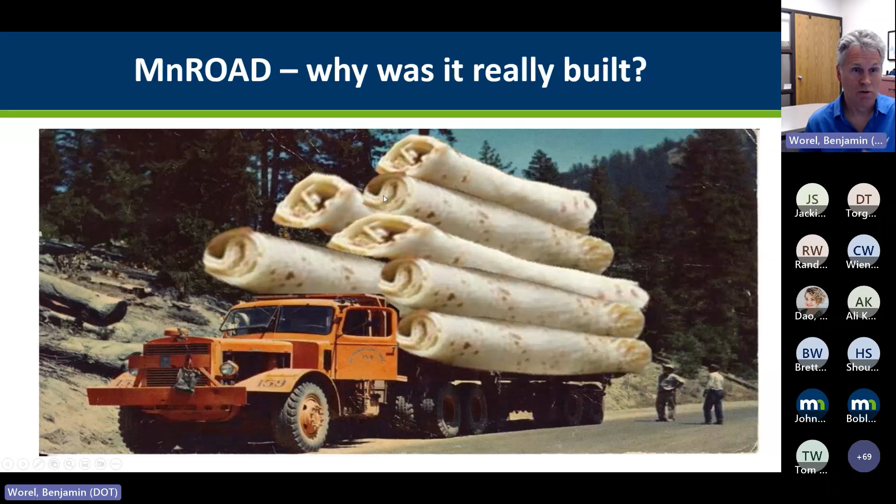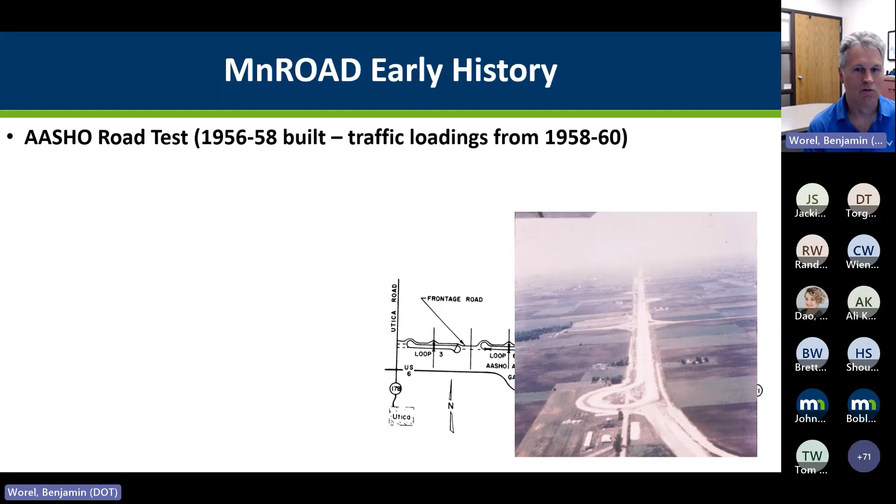It probably wasn't to haul the lefse from Norway to Minnesota, but really, early history when you look at MnROAD, it's really looking back to the AASHO road test. That was early on in Ottawa, Illinois. They built a section that looks kind of eerie, like MnROAD in a way, with a low-volume road. You could have taken this picture probably from Dan Rauscher. Could have been out at MnROAD doing some live dynamic testing, but a lot of instrumentation went into that.

MnDOT really started looking at kind of the need for local calibrations based off those AASHO road test results. How do you do it in Minnesota? How do you do things like that?

So we did kind of investigation 183, looking at some of the flexible pavement designs. SHRP LTPP started national efforts in '88. That's when Gene Skoke and Dick Engberg used to take me out for ice cream cones celebrating that date. But that's when we started working with the LTPP, which really helped with our local calibrations.

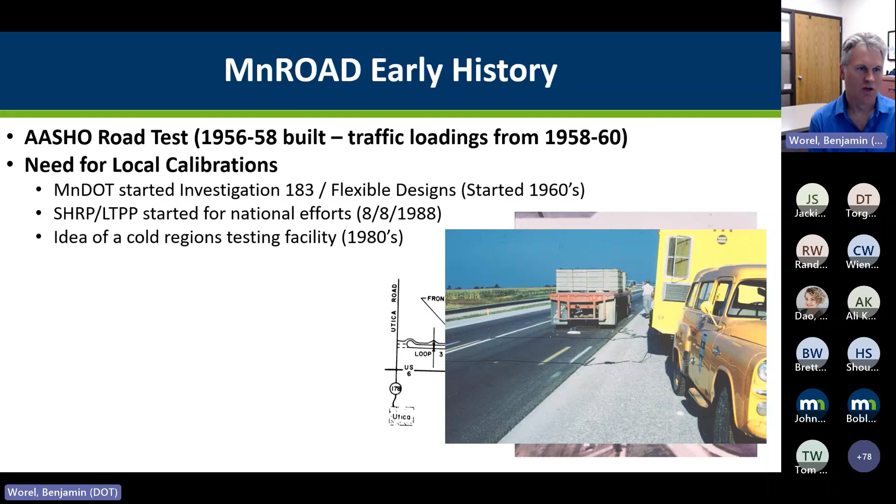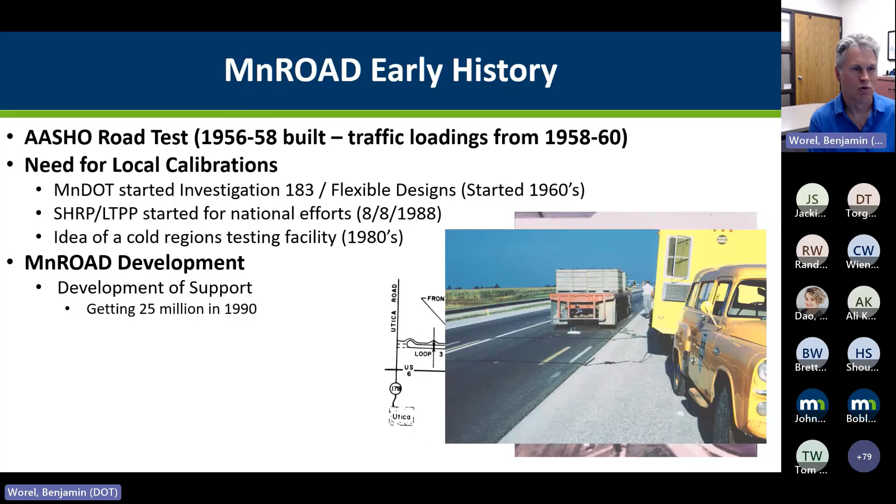We started talking about the need for a cold weather region testing facility in the 1980s, and that's kind of when the idea of MnROAD developed, the idea for development support. We had to get $25 million to pay for MnROAD in 1990. That's pretty amazing. You have people here in Minnesota that I'm not going to go through all the names, but they were influential in getting this funding needed to build this type of facility.

When we started looking at the facility being built, can you imagine trying to find 75, 80 million in today's dollars? It's pretty incredible that they were able to do this, in a political situation that we're all in as DOTs. So hats off to them.

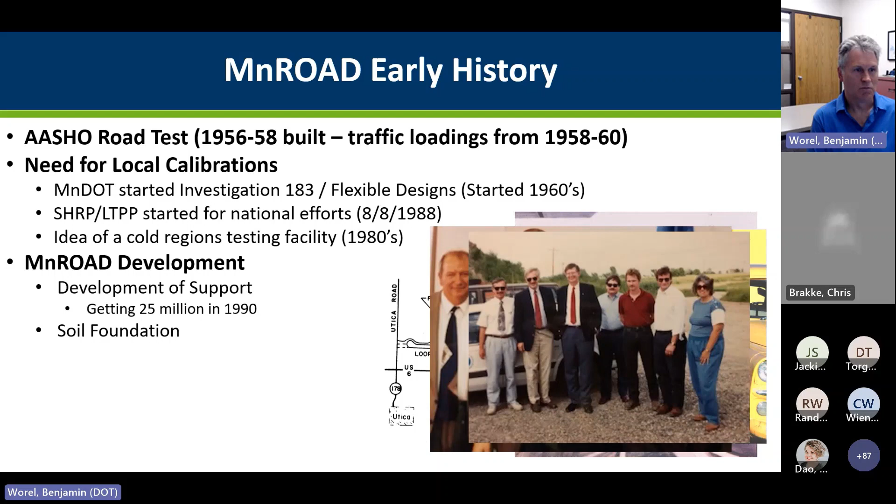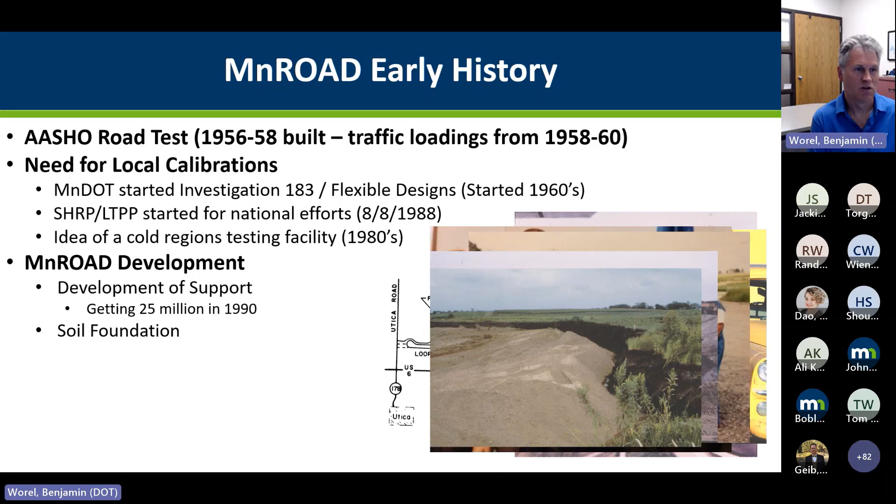They did a lot of different soils work. It's hard to imagine this was MnROAD, but this is part of MnROAD as they brought in different soils and different sand. We had sand and clay subgrades. There's clay out there right now. That's our natural soil foundation.

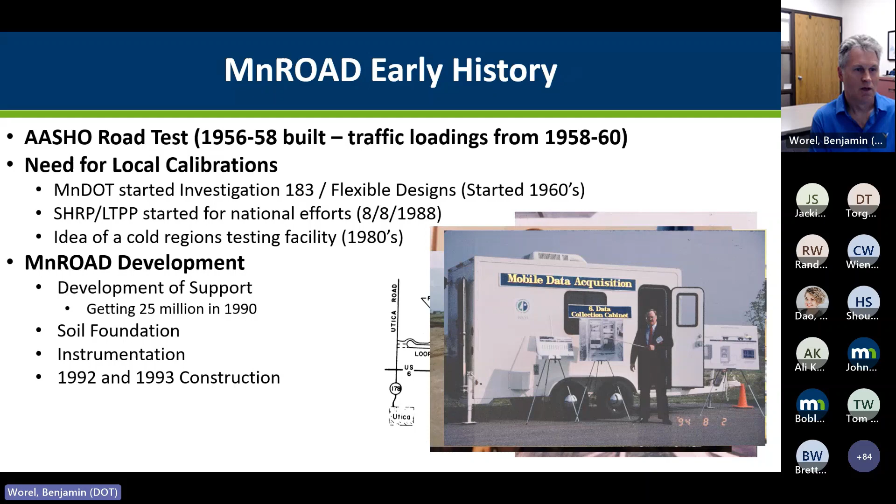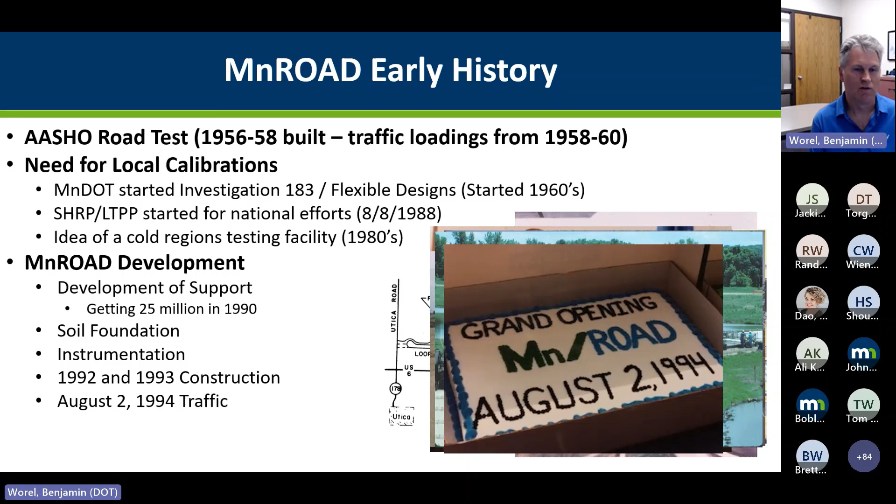The instrumentation needs - this guy's got the best picture of the instrumentation. We used to have a mobile lab. But the construction was done in 1992, 1993. They're paving the loops, and on August 2nd, 1994 is when traffic was placed on MnROAD. So that's some of the early development.

MnROAD is owned and operated by Minnesota DOT. We do both concrete and asphalt research. We also did gravel road research at one time on the low volume road. But again, we have 30 years of customer service. Minnesota Department of Transportation has been a key player for many years. The Minnesota Local Road Research Board, cities and counties, provided up to $500,000 per year for the last 30 years. So thank you very much to them.

As time went on, we started doing more national things, before we did more localized Minnesota things, which is not bad. But we did start going outside for SHRP 2, NCHRP, FHWA, and different partnerships. We started later on after probably 10 or so years of activities. Right now we're doing a lot of pooled funds and working with industry.

We did major experiments. Phase 1 was a structural experiment, like I said, looking at the AASHTO designs, Ottawa, Illinois. But basically we found that our 7.5-inch concrete lasted as good as our 9.5-inch concrete. You can have some savings there.

Also, we found that the environment plays a bigger role in our asphalt pavements than we originally thought, and that's kind of nationally. We saw that through the SHRP and developing asphalt binders for your local agency and traffic. The last few phases in 2017, a lot of work with NRRA and NCAT. I'll be talking about NRRA quite a bit and touch upon NCAT, but in phase 4 that we just went through, NRRA and NCAT were also key players in those experiments.

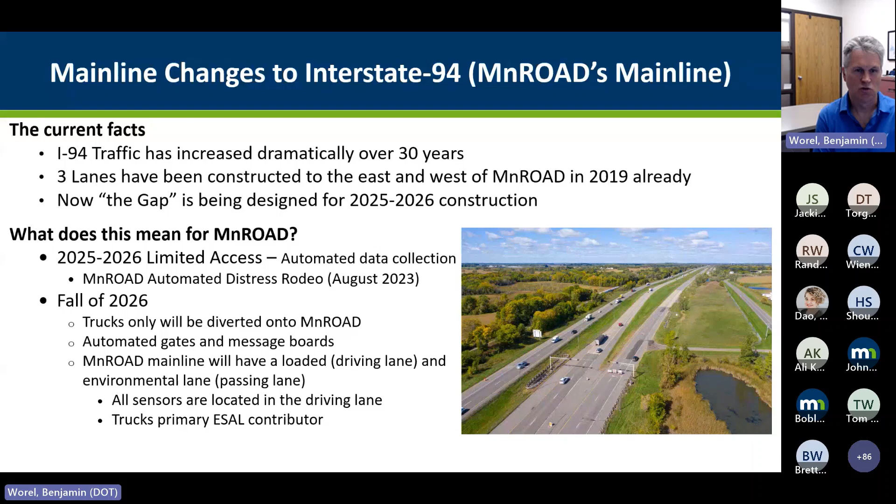But we're looking at different ways that we can monitor pavement performance without being on the roadway itself. And so automated distress is one way we're looking at that. At drones, GoPro cameras, a lot of different things. So if you have ideas on that, let us know. Jacob Calvert from our office is leading that.

But in the fall of 2026, MnROAD will turn into a 1-lane, trucks-only, diverted onto MnROAD. We'll have automated gates and message boards to help the driving public and get the trucks onto our test sections. But again, MnROAD main line will turn into what the low volume road is, where the driving lane will be where the trucks are, and the environmental lane will be the passing lane.

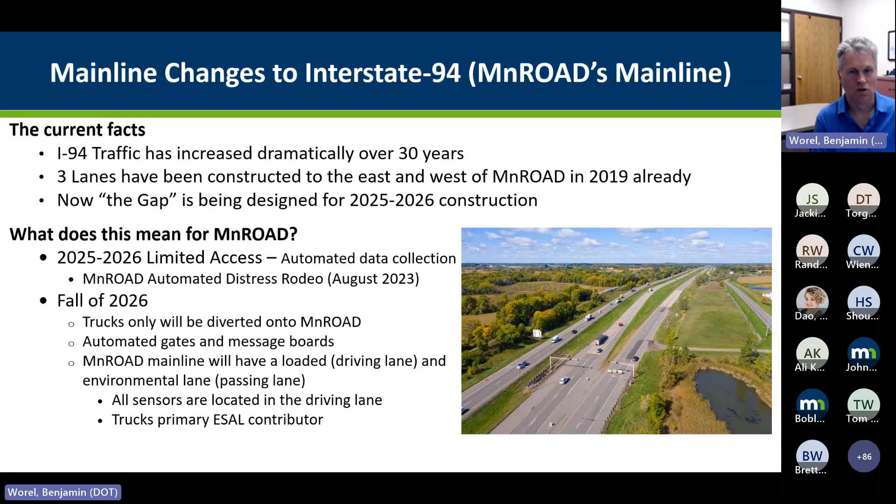So it'll be a little different, but I think we'll still have lots of ways to look at different materials and how they perform over time. Again, all the sensors are located in the driving lane, and the trucks are the primary ESAL contributor anyways. So I think we'll still get the same ESALs that we have now.

Talking a little bit about the fine research staff we have here.

That's not them. One of those turned into a marketing person, and the other one is still going to school, my daughters, when they were skating out at MnROAD many years ago.

But again, the experienced staff, we have 27 road research staff under Jeff Brenner, working both at MnROAD and other areas. We also got a very active Maplewood lab group that supports MnROAD and works with MnROAD, and the material engineers support us throughout our districts in Minnesota here.

Again, our MnROAD operations, I work with Emil, Joseph, Michael, and Jacob. Great staff, engineers to have on staff. Also Jeff Tabry out at the site with Craig, Dan, Jesse, Troy, and Steve. Steve kind of works both in MnROAD and Maplewood. But again, you can kind of see where the red is people that work both at the Maplewood lab and at MnROAD. The black there is the ones that work out at the MnROAD facility.

So we have 10 people working with research projects. So when you work on a project, you'll probably be working with one of these people there, and they do a great job.

So when we talk about data at MnROAD, you talk about performance monitoring, we've probably tried everything. That kind of shows a list of different things we do between the distress surveys, the modified LTPP survey, to dynamic load testing, to joint faulting, friction, falling weight deflectometer, noise, piezometers, pliometers, ride quality, pathways, LISA, and all of these different types of things, surface texture. We've done a lot of different things, and these are the things that we do all the time.

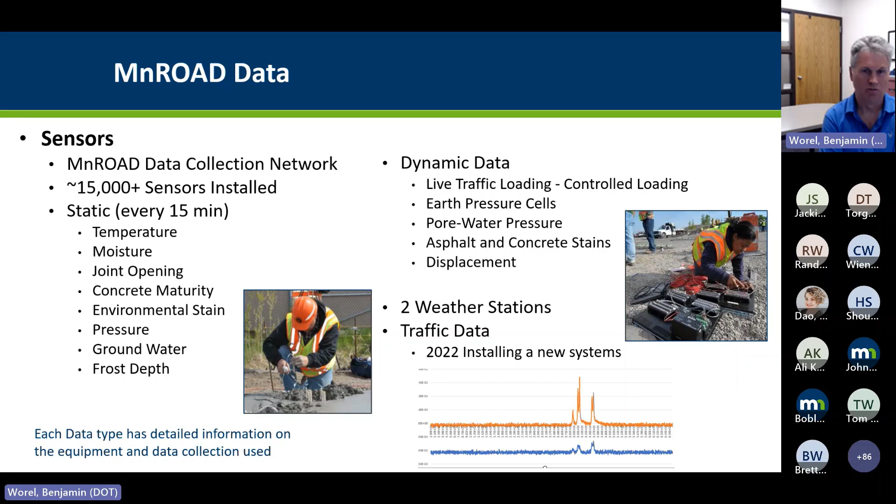But lots of experience, lots of different types of data, static and dynamic. And again, we have information over 30 years on all these different test sections that we have. And we also have 2 weather stations and traffic data, and we're installing some new sections right now, kind of looking at different national calibration needs for different types of weigh-in-motion sensors. Joseph Podolsky's working with that, with these national groups that are doing that and the partnerships that are involved to bring that to fruition.

So when I talk about data, I mean, this is kind of crazy, but when you look at thermocouples, this is temperatures, and we have temperatures down in the asphalt, concrete, we have them in the base, we have them in the sub-base, we have them in the subgrade. We can go down to 8 feet on some of our thermocouple data. But we've been collecting this for like 30 years.

Whoops, it's not supposed to do that.

And when you look at that, this is a number of rows for each year of data. It's just kind of mind-boggling. We're talking about 37 million records in 2013, things like that.

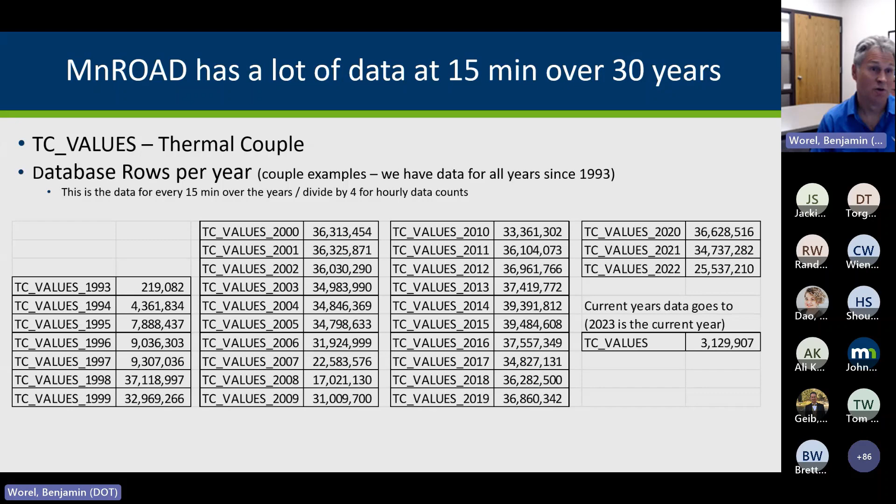And this is just one sensor, one type of sensor. So all the ones have similar information. So it's mind-boggling how much data is out there and how much it could be used and how much is probably underutilized. So if you have interest, let us know.

So when you talk about getting access to the database, the MnROAD database has really kind of evolved. We do have an Oracle database here in Minnesota, but we have been utilizing the InfoPave system that LTPP has developed. We use that framework to develop our own, as you can see right there, but it's under the non-LTPP side of things. NRRA helped fund this, MnDOT helped fund this, and FHWA has been a great partner in working with this. We're seeing how we can bring test track data into a national database to be shared.

And what this system does is allow users to get a MnROAD overview. You can find test sections. You don't have to know what cell it is or what section it is. You can just say, I want warm mix asphalt, or I want fiber reinforced concrete, things like that. It'll tell you the test sections. You'll be able to see the available data, view the data. You can see the performance maps, the performance, and maps of it. We're working on getting related reports to each of those efforts, and we're working on the sensors right now. So a new release will be coming out soon.

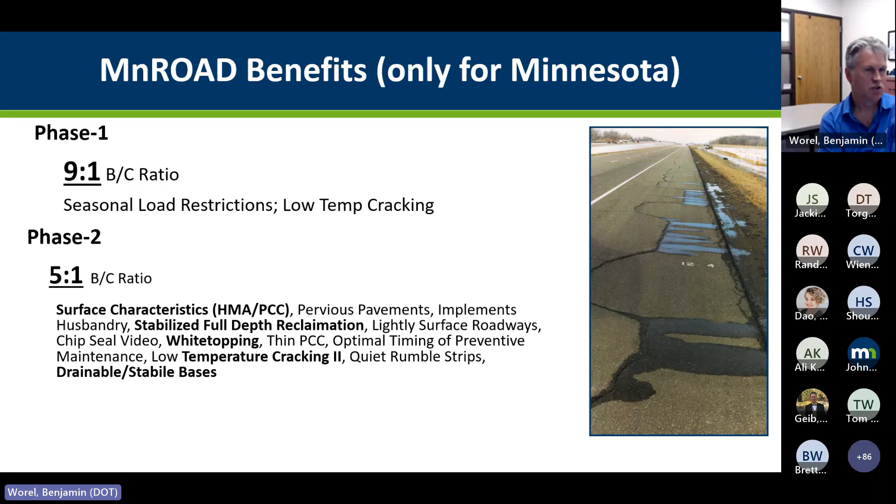So when you look at all the things at MnROAD, we've done a couple different benefit cost ratios. We did one early on with our phase 1 efforts. We found that we got a 9-to-1 benefit cost ratio looking at spring load restrictions and how we've saved money with the process we have. Low temperature cracking is another one. In phase 2, we found a 5-to-1 benefit cost ratio. So, and I'll talk about a few of these projects, but we have seen that from the investment in the research, we have gotten benefits beyond what we've invested.

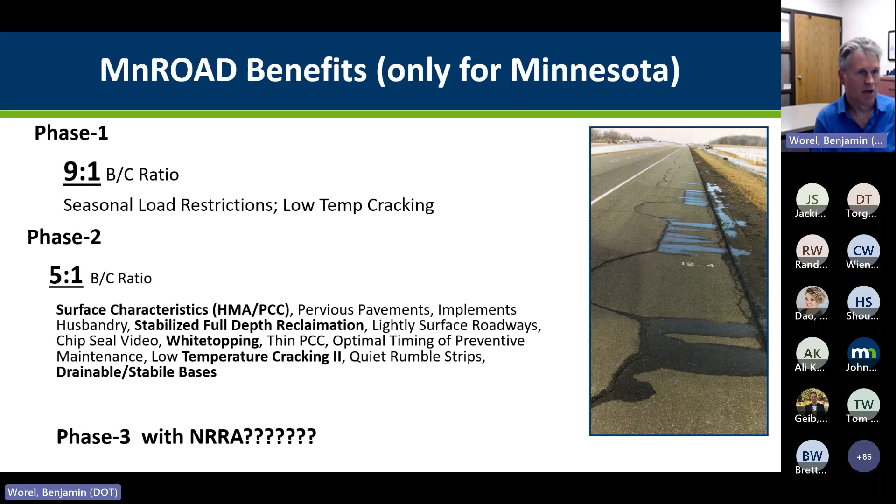And I'll talk about a few of those here. So, one of the things we should start thinking about is phase 3 with NRRA, kind of coming up with another one of these efforts as we move forward, but that's something in the future.

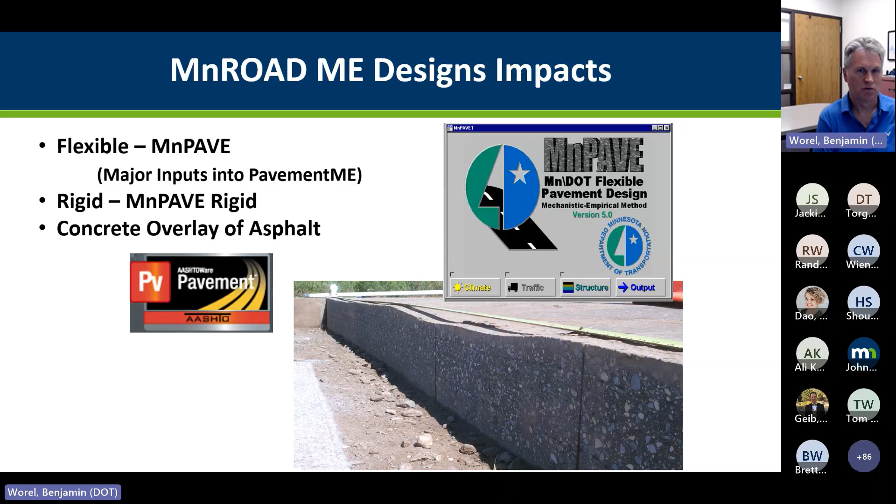So I think MnROAD's done a great job on pavement ME, looking at developing MnPave here locally for Minnesota. But again, major inputs to pavement ME we've developed. That's our flexible. We also did the bonded concrete overlay ME on asphalt. Again, you can see the picture there of whitetopping that looks like it's gone horribly wrong, but actually I think that's beautiful, because that shows how you can try a design, see how it performs in a small scale, and say, hey, maybe you don't put the joints right where the wheel paths are. Maybe you can't do a 3-inch concrete over asphalt.

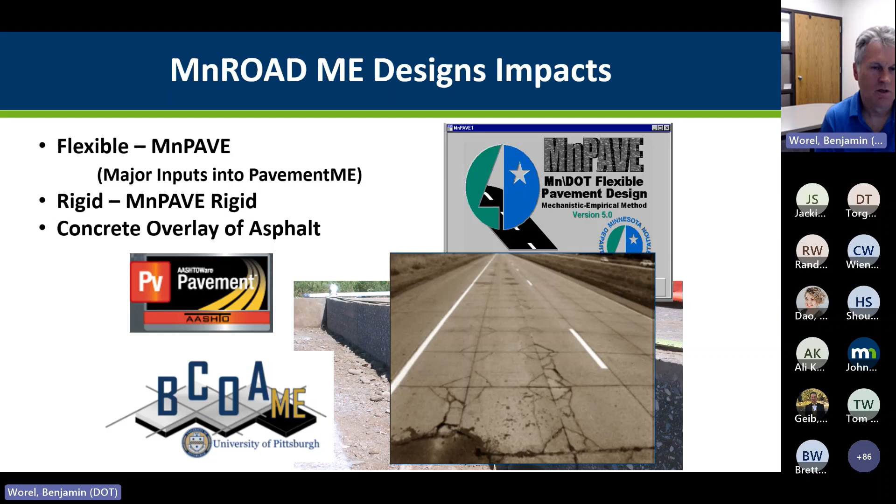But it did show that you can get 7 million ESALs on it before this happens. So maybe on a low volume road that might work. So it kind of shows how MnROAD can be used as accelerated pavement testing.

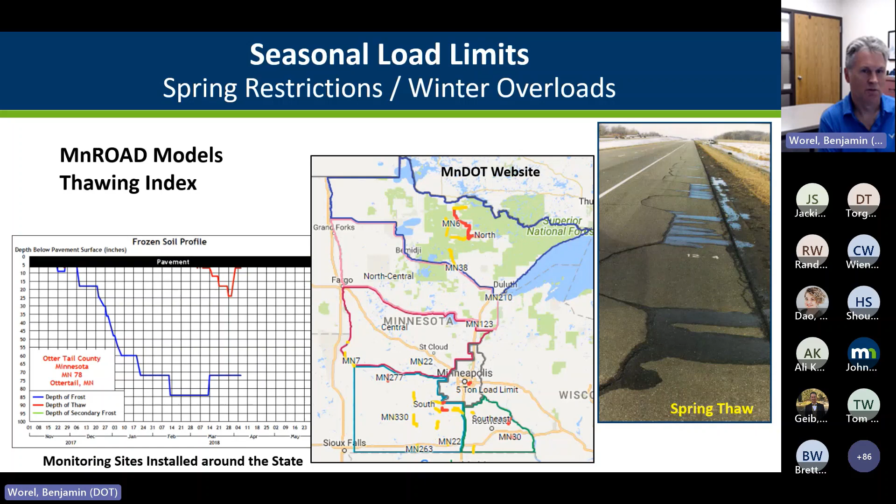We've done things on seasonal load limits. We do spring restrictions here in Minnesota and winter overloads. They have a great process with different monitoring sites around the state, and models that were developed from MnROAD to help local agencies put on spring load restrictions.

We've learned a lot on low temperature cracking. Again, I mentioned before that with HMA, we learned that the environment plays a huge role in its performance. I don't know if we were using asphalts that weren't for Minnesota, but now we've learned better, I guess. You can see here the original test cells at MnROAD, the first 1994, 1995, related to linear feet of transverse cracks. We had 2 different asphalts, but we had very little cracking.

You can see that we had 5-year and 10-year cells. The solid is 10-year, the other 5-year. So it's basically thick and thin, if you want to think of it that way. But you can see how the 10-year and the 5-year cracked the same. That was because there's a PG 58-28 in the green. But you can see that the 64-22 cracked a lot more and stayed cracked. And again, this is just the linear feet of cracking. The distress changed over time and got more severe through the years. But it really shows how picking the right asphalt is really beneficial.

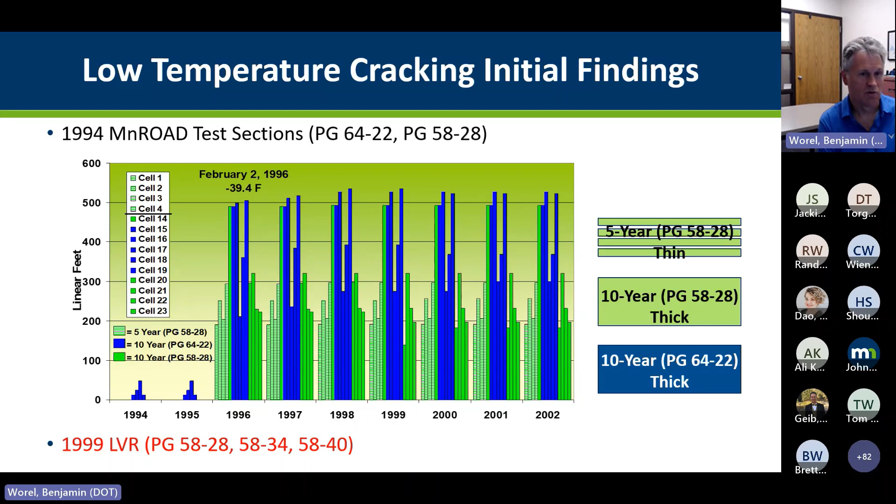And then even a simple study we did in 1999 on the low volume road, where we used a 58-28, 58-34, and a 58-40. We learned from there that the 58-34 is the Cadillac oil here in Minnesota, but it is more expensive because it's polymer modified. The 58-40, in 1999, didn't work at all because of engine oils that were added and it separated. We got a lot of cracking. The 58-28, we got our normal cracking. But we've improved upon that. We do have 58-40s now that are better quality asphalt materials from our refineries in the industry.

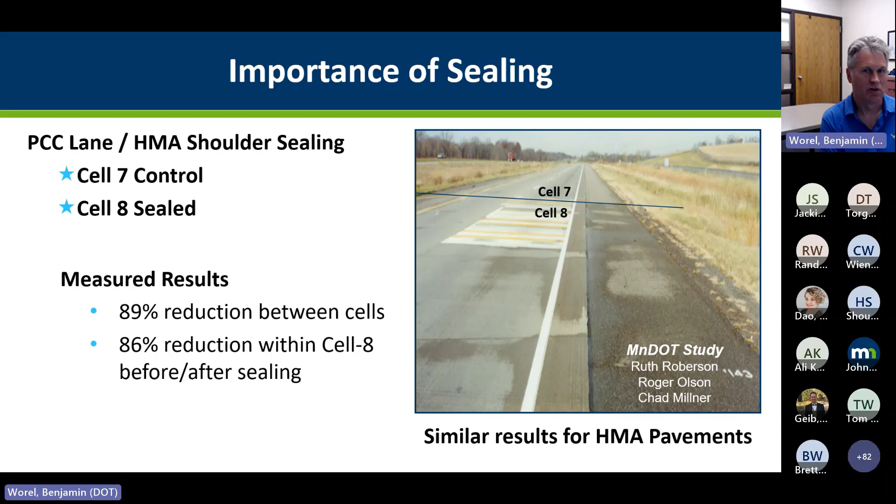Learned a lot about sealing, that if you can keep the roads sealed, you get a lot less water going into the bases. The instrumentation at MnROAD showed this, where you get about a 90% reduction if you seal the edge joint or seal the cracks. We did both asphalt and concrete and different things. So sealing is important if you want to keep the water out.

And we learned a lot about drainage. You can see the transverse crack there in the upper part and how that asphalt deteriorates. We get an increased ride roughness when we don't have a base that drains. We also see it in concrete, where Tom Burnham worked a lot with this. You can see there where we had a non-drainable base, the scoured concrete on the left concrete core. The right concrete core had a drainable base, PASB.

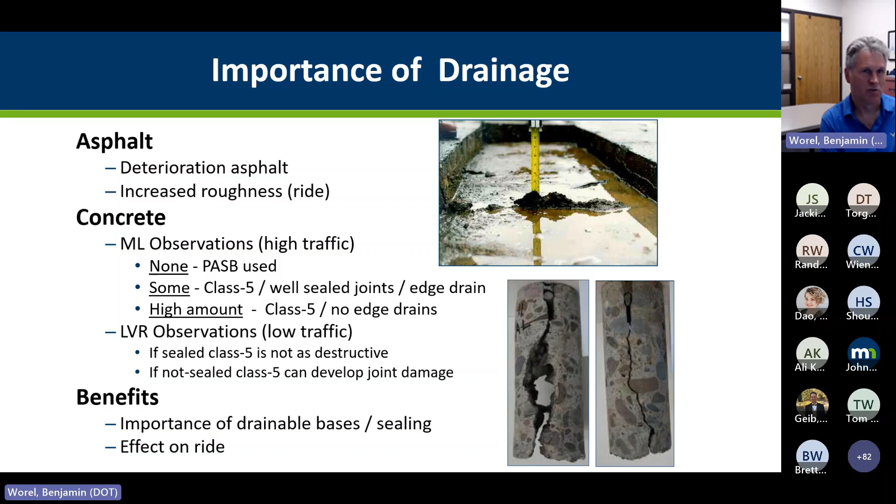And that allowed the water to flow through and not get caught in that joint and have problems as time goes on and traffic goes over it. So again, it really shows the benefit of having a drainable base. Even though it is harder to construct on a drainable base, I think there are a lot of benefits to having that drainable base there. Talking about drainable bases, we did some work with geocomposite barrier drain.

This is something that Bernard and I kind of talked about doing, since you could have a regular base underneath a concrete road, but you could drain just the concrete joint. And this actually is a spec here in Minnesota, utilizing this kind of layout as an alternative for different construction if they'd like to try this type of method on a road. We've done this on some of our ring roads around the Twin Cities.

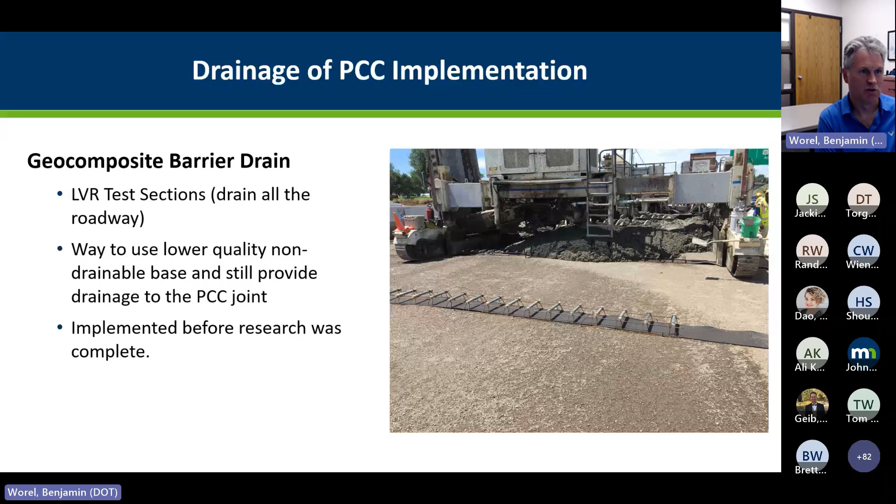Recycling, again, I think this has been a very important project because it really shows how you can recycle a road and put a very thin surface on it and get a good performance. We designed this in 2007 to last for 5 years. It went on for 13 years, and we still had good performance on a few of these cells. So it really shows how recycling does pay off.

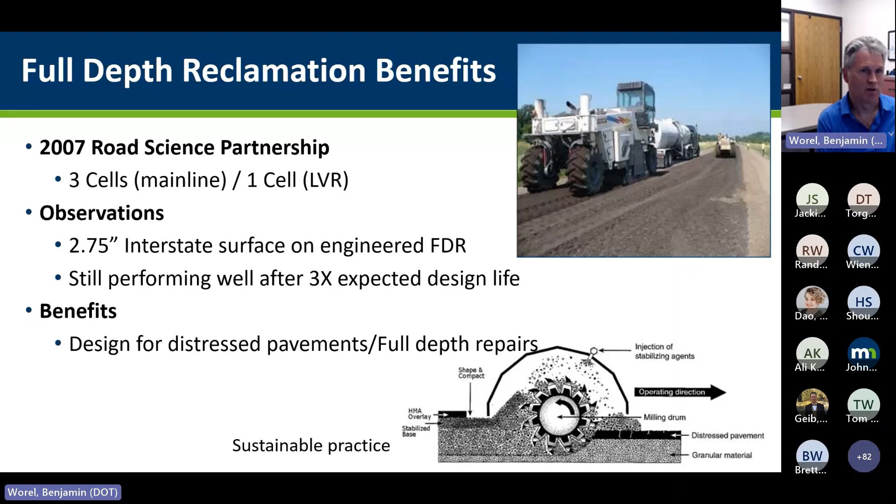And that kind of ties into what we've done with 70th Street, which I think has been another important project that MnROAD's done, where we did thin overlays on all these, but then we did SFDR, CIR, CCPR, and regular mills and fills. But really, we had a hideous road, and we've gotten a good road out of it. And it's been since 2019 on that. We've gotten 4 years of performance out of a road that I didn't think would ever last.

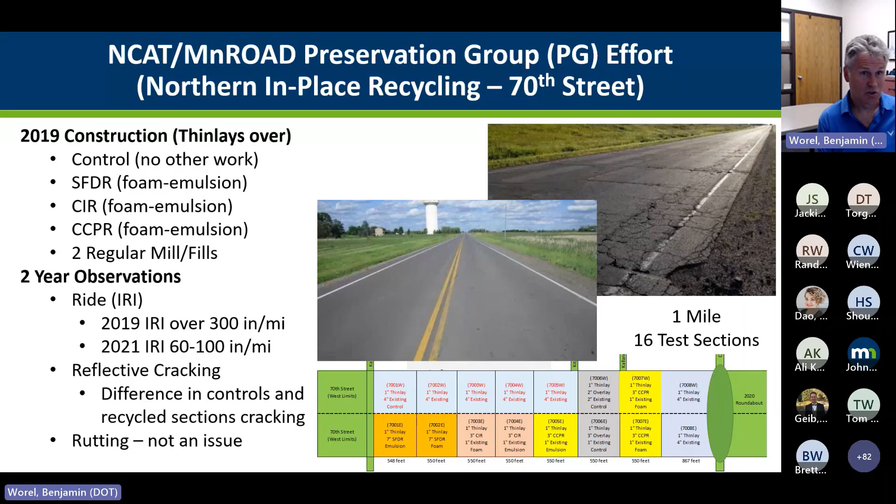And that kind of shows the partnerships we have with NCAT and the benefits. They've done some stuff down south. We've done some stuff up here north, both accelerated pavement test facilities. We've worked with the cracking group experiments, looking at different types of cracking and performance tests that go along with that, with test sections at both MnROAD and NCAT.

The additive group study is something that we're in right now with NCAT. NCAT's really focusing on fatigue cracking and we're on reflective cracking, and I'll talk about the MnROAD reflective cracking challenge. But again, there's been great coordination. New York has made that possible with their participation, and the preservation group study that we've been doing over the years. These different types of partnerships really help out, I think, with our customers and their needs.

It sounds like states are going to be building test sections and monitoring them, providing data to us to put into the MnROAD database. But training and implementation is going to be key to this too. There's a number of customers that we need to work this project towards, in phase 3. When it comes down to it, we'll be developing this for 2024 in January. So at NCAT, that's solicitation 1581, if you're interested in that.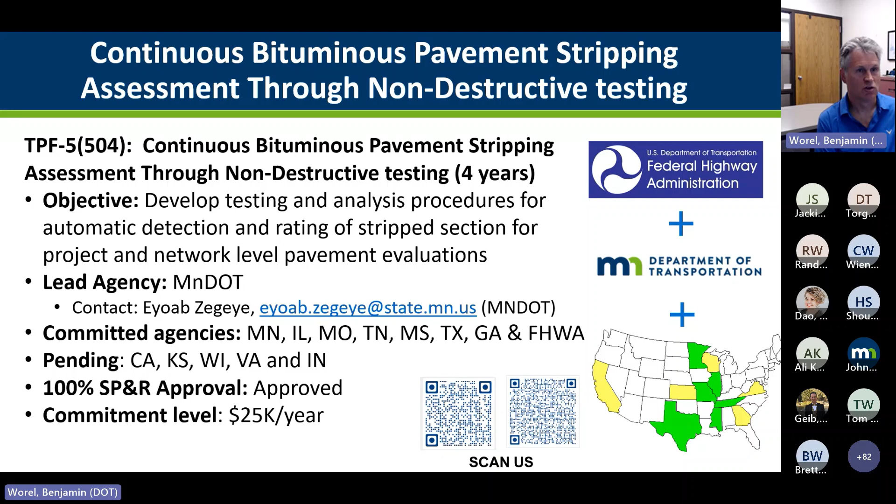This study is looking at GPR and how to find strip sections, looking at moisture and bases and things like that. This is another pooled fund that's bringing different types of technologies together. MnROAD has equipment called the MnDOT Road Doctor, which has 3D GPR, and a falling weight deflectometer goes along with that, and so on. So some different technologies and different pooled fund studies that I wanted to mention.

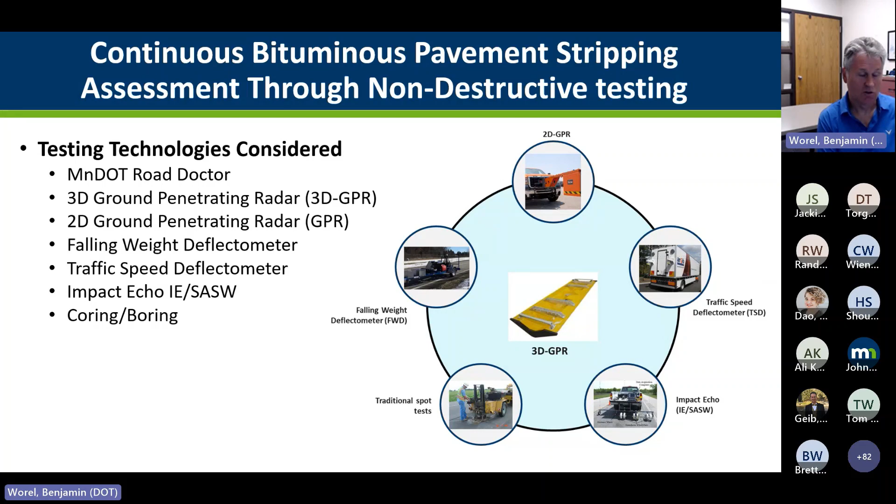I've gone over my half hour on MnROAD, so I'll talk a little about the National Road Research Alliance. I think this came together as MnROAD started out being very much Minnesota-focused. Later on, after 10 years or so, we started talking about how this facility could be used as a regional, national facility to help out others, and I think it also helped with some of the costs of the facility.

We used to have TERRA before this. They didn't have money to do things, but I think NRRA has the funds to do stuff. It's TPF 5466. We finished our first 5-year phase 1, and now we're into phase 2, the second year of that. We have, as you can see there in yellow, our 13 full participants.

Our fee structure uses SP&R, state planning and research dollars, that are used for pooled funds. It's $150,000 if you're a state that's as big or bigger than Minnesota in SP&R dollars. If you're lower, you get less SP&R dollars, so it's $75,000 a year. For example, North Dakota has less SP&R dollars than us, so they pay 75, whereas Minnesota pays 150.

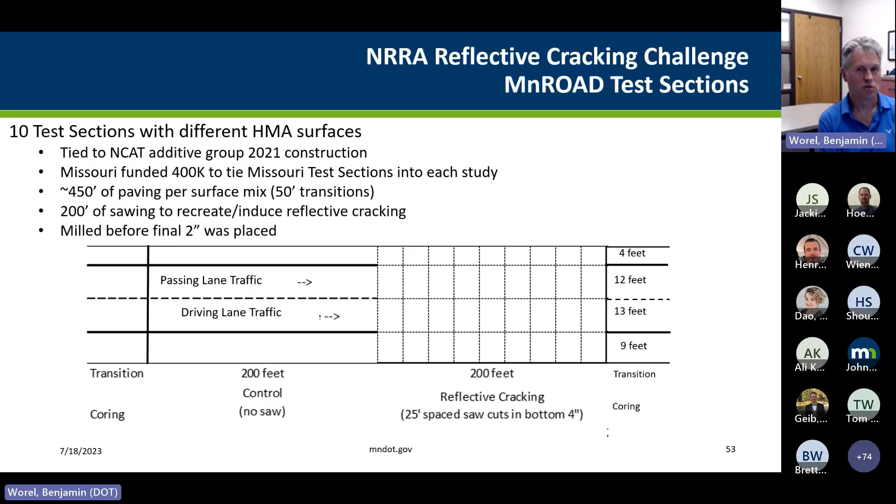But we built some test sections here in Minnesota, looking at having 200 feet of no saw, but then we have 200 feet of sawed material that all these different mixes were placed on top of for our test sections. And looking at those test sections, we built stuff with wet and dry plastics, wet and dry rubbers, control mixes where we did...

4934, that we feel that if you look at the lab tests, it should rut at 2238 there, but we're not seeing that in the field. So we tried that because that's a very economical binder.

But we also used our traditional 5828s and 5834s, looking at other controls, along with the SuperPave 5. So we're able to do lots of different things.

But again, this was brought together. The connection with NCAT is because New York participated. And so we were able to do a no-cost agreement with NCAT, having the funds to be utilized from New York to help with the tying of these projects with NCAT and MnROAD.

They did a lot with getting these materials. Again, these same materials are down at NCAT as in Minnesota.

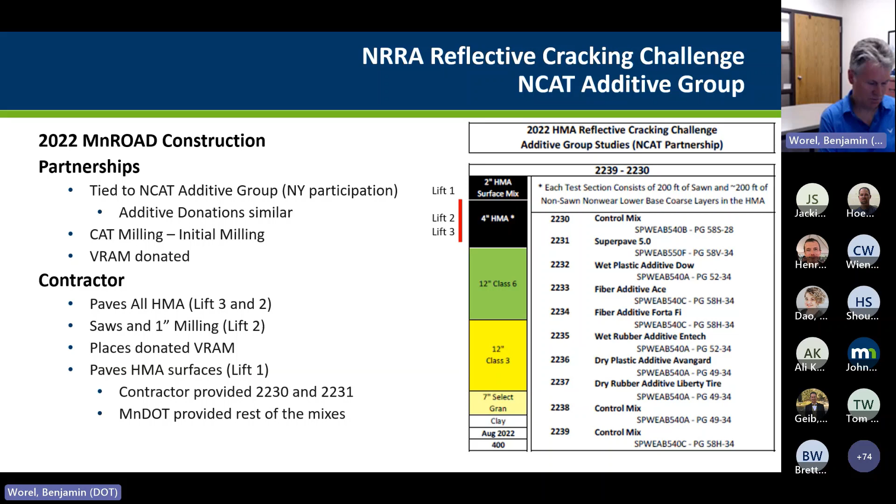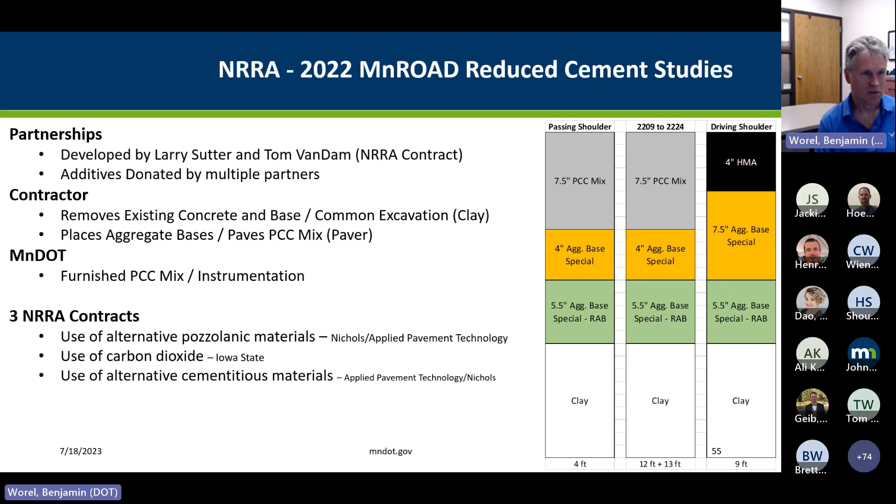We do have 3 NRRA contracts related to it, but again, we're able to build these test sections through the power of partnerships. So really, how do we effectively share costs, as I wrap this up?

I think research really needs, sometimes you just need the research, but sometimes you need the research and construction. MnDOT, if you do that construction out at MnROAD, we've been doing all the performance monitoring there to provide that information to us and the DOTs.

We've really gotten great help from industry. CAT has always been interested in coming out and doing milling and paving for us, to improve their equipment, but also give their engineers some on-site experience.

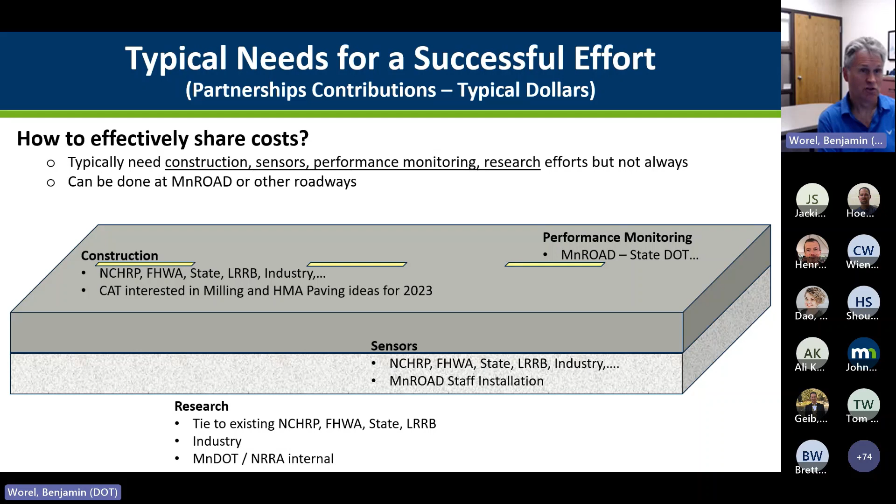But also sometimes you need sensors. So all these are ways that we've been pulling together research. I think that's really the power of NRRA, to pull all these things together.

When we talked about some of the things coming up, we mentioned the call for construction that went out. The problem is we really didn't have construction money to do stuff. The STIP money we'll be getting annually for the main line will help do mainline stuff, but for low volume roads we still need to find money, either from MnDOT or other groups.

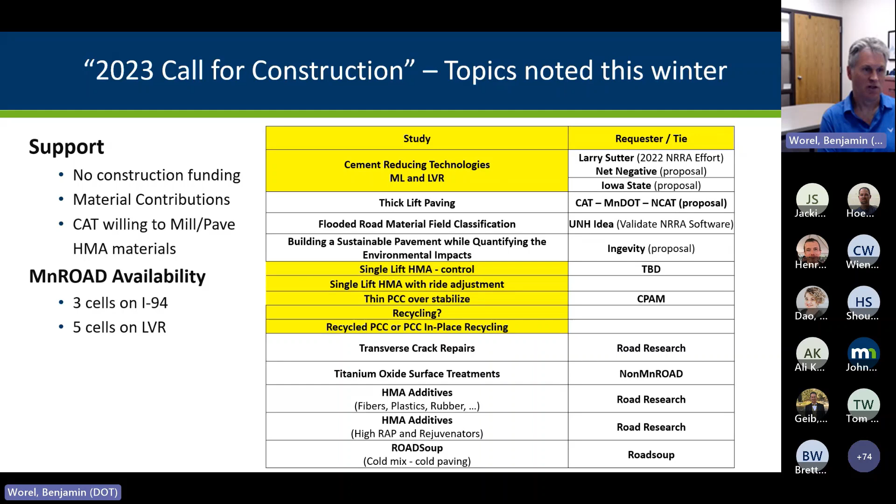We did get a lot of material contributions, which is great. CAT was always willing to mill and pave. But we had three cells on I-94 that needed to be done, probably about 1,400 feet, and 5 cells on the low volume road that need to be done.

So looking at our prospects coming up this year, 5 cells on the low volume road - since we didn't really have any money, we'll be leaning towards the Local Road Research Board on low cost approaches to roadways. We're going to look back at their research from the last few years and try to come up with low cost approaches that will interest them.

Water repellency, again the NRRA NCHRP effort, we'll be doing that in the northwest corner of the low volume road in 150 feet.

We're working with Eyoab and Kyle on HMA stripping calibration sections, through that pooled fund I mentioned earlier, on a low volume road service road. The idea is to build different areas with different characteristics in those sections with concrete asphalt and replicate stripping of the asphalt, and see if we can find it with the different equipment we have, like the rolling density meter and the road doctor, to get that information.

We also had some repairs we needed to do in 2023 from the 2022 construction in the WIM area. We'll be doing that in the next few weeks with some diamond grinding, so we have a nice smooth transition going into that weigh-in-motion section we're developing.

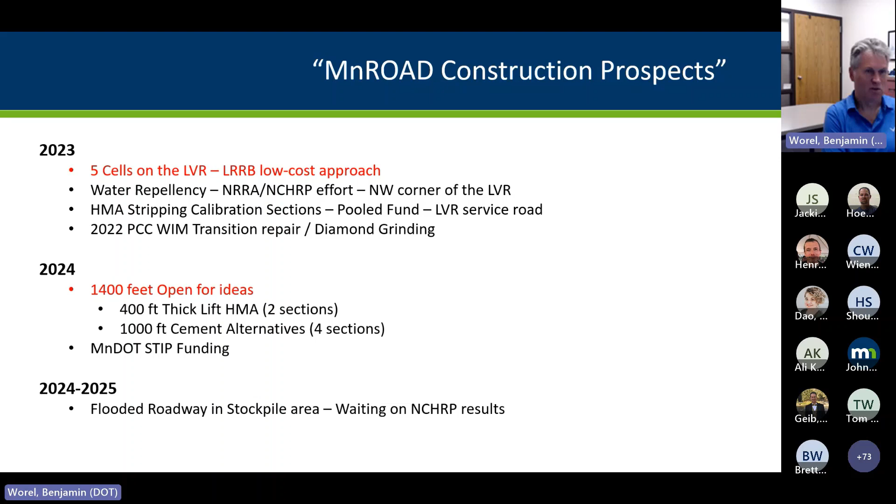So with that, the whole idea of this was to really show how MnROAD evolved, all the different things we've done out there, and looking also at NRRA, all the wonderful work. I think it really helped having money to do things, to get projects done. We don't just talk about research, we're actually doing research that's making a difference. Jerry Rohrbach, who was in our office here at MnDOT materials lab, always talked about working together - you can be a part of something bigger than yourself.

I think that really holds true with how MnROAD has progressed over the years and how NRRA has helped work with what the states are looking for in research efforts. So with that, thank you.

And I've got 5 minutes for questions. I don't know if Lauren, have you seen any?

Yeah, we did just get a question, and it's: is agency membership still slowly growing, or has it become somewhat stagnant?